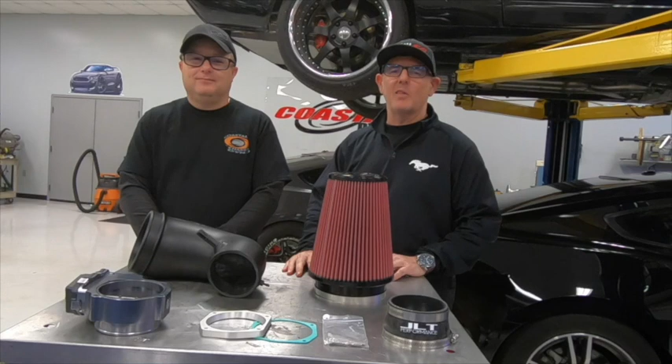Back at Coastal Dyno, hanging out with Sam. Got the GT500 on the dyno. It made, what, 930 or something like that? Yeah, like 935, 630 foot-pounds of torque. So we're going to go for more. So we got some new parts.

As you can see, we got a prototype JLT cold air intake with a big giant filter. And we've got a big giant throttle body from VMP. Yeah, 105 millimeter. The factory throttle body is 92. So we're going to try and stagger the installation. We're going to do the intake first just to see. I have a suspicion that we're losing a lot of airflow just through the factory intake.

So this unit will be available, I think, Jay said, in 30 or so days. So okay. Yeah, this is a prototype, 3D printed, but it's the right shape. It's what you're going to get if you got a GT500, right? Exactly. And they'll also be coming with most likely a new airbox also. Right now we're just using the factory airbox. Like I say, total prototype. It's just for testing purposes.

And real quick, what's done to the car to get to the point where we are with 930 something horsepower? Yeah, right now it's got American Racing long tubes on it. It's got a Joker's Performance ported blower, Griptec 245 pulley. It's on E85, ID 1300 injectors, and a JMS booster pump, and that's it.

And we're probably actually running way too small of a pulley on the car right now, but we're not putting a lot of timing to it. We're just being careful with what we're doing and taking it step by step. Hey, and they're brand new, so it's all experimentation anyway, right? Exactly. Yeah, for sure. All right, let's get back in the shop, and this should be a pretty easy install. We'll throw the parts on, and then we'll put the throttle to the floor.

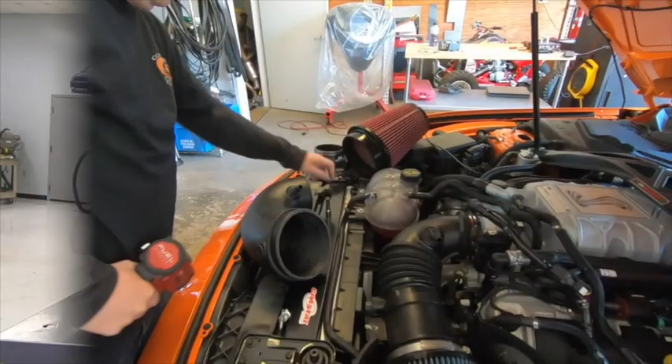10-4. All right, so here's a look at what we got going on. We already took the factory lid off. Sam previously installed a free-flowing filter. And just like any cold air intake, you're gonna disconnect some sensor wires and clamp to the throttle body. This unit will come out, no big deal. Here's a little comparison between the JLT and the factory. Sucker is huge.

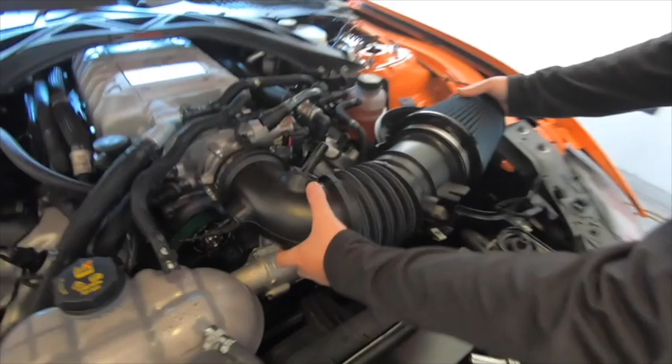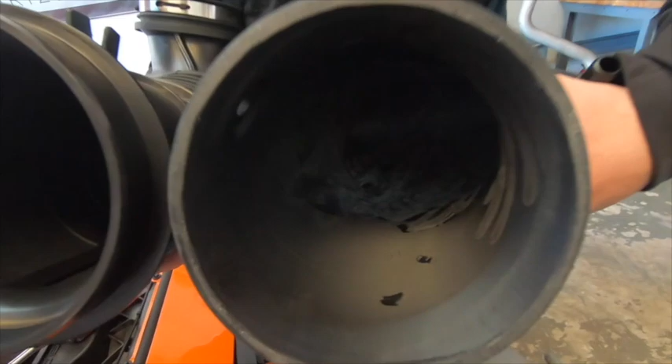We already pulled the filter off just so we can get a look inside and see exactly the difference between the two. Yeah, like I say, the inside of this is 3D printed, so it's not going to be like the production piece. Quite a bit larger on the JLT, and obviously it doesn't have the ribs. Yeah. So the turn should be a little bit smoother.

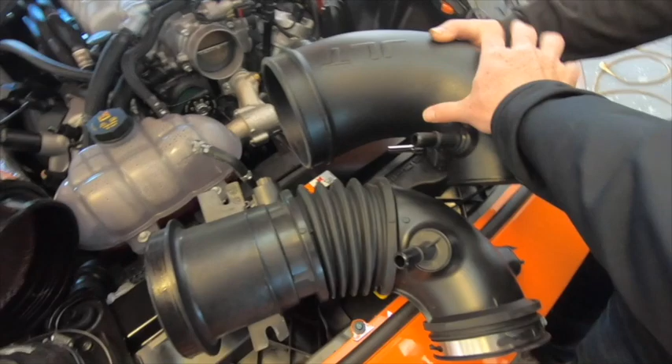Do a little compare. Let's hold them next to each other like this. Yeah, you can see in the radius, the JLT is much larger. It's obviously larger at the filter opening, but the radius is much bigger. So this kind of chokes down, still enough to make 760 plus.

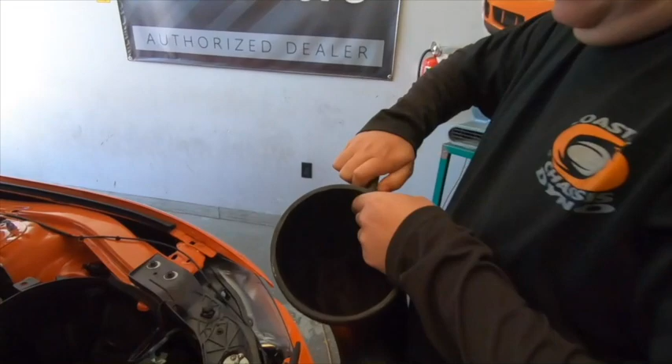Oh yeah, absolutely. The only thing that you physically are going to be reusing out of this is going to be this sensor right here. It should just turn and pull out, and you can throw this in the JLT. It uses just a grommet. You just kind of slide it back in there like so.

So the JLT unit actually comes with its own airbox. Don't have that as of yet. So what we're going to do just for testing purposes right now, we're going to go ahead and just remove the factory airbox so that we can get the JLT in there on the dyno.

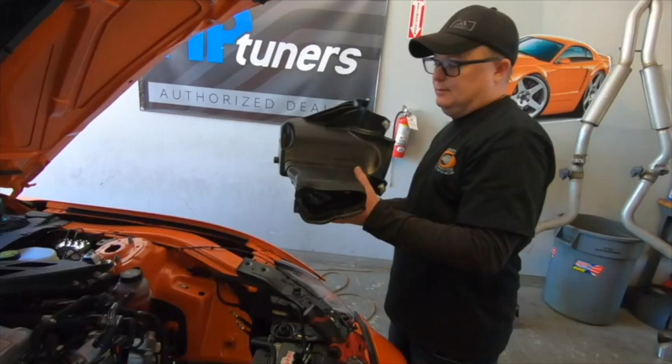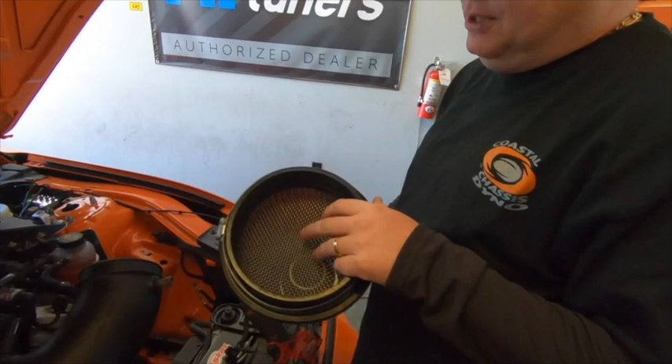Hey Sam, before you throw that on, I see the filter has this screen. What's going on with that? Yeah, that's usually for like a mass air car. This kind of smooths out the intake of the air. Obviously on this vehicle that isn't really necessary because we don't have a mass air. All right.

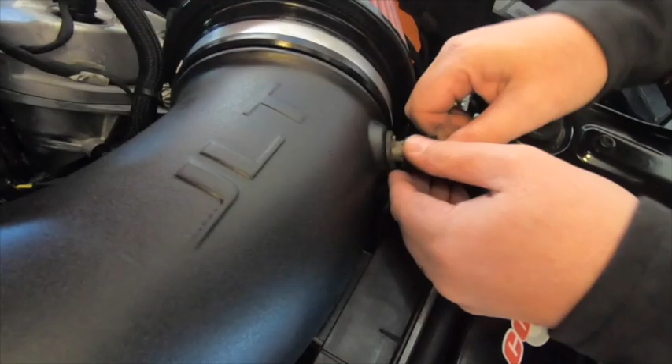All right, we're back in the car. Sam's doing a little computer work. Yeah, so we're gonna make another pull now. We haven't changed anything at all in the tune from our baseline. Still only running the car at 8,000 RPM. We're not running any higher than that, just to be fair with the differences between the two.

What a lot of people may notice when we do dyno pulls here is we're actually on a load-bearing dyno. So we're actually loading the car to the weight that the car would physically be pushing on the street. That's why you see that our dyno runs are a lot longer than you would see on, say, a Dynojet that was non-loaded, or some of the other dynos that don't have loading capability.

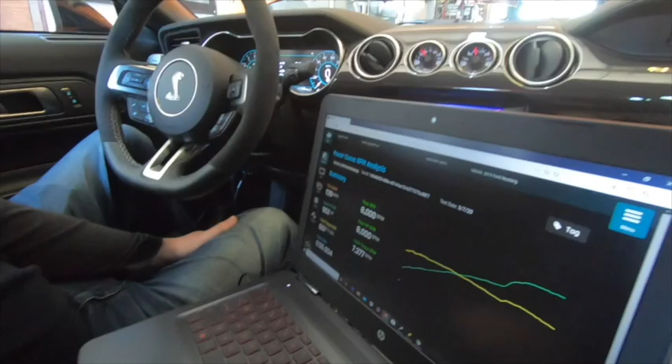On the boost, you could watch the tach really just take a jump. That's when it spun the tire, right? Yeah. So 962 horsepower. Yes. 667 foot-pounds of torque. So we picked up from the intake more or less 30 horsepower to the rear wheels. Just from putting the intake on, so pretty impressive. And you didn't even tune it, so... Nah, we haven't done anything.

Just to be perfectly honest and upfront with everybody, I've got a lot of power pulled out of the car down low. It's not going to affect what peak numbers we're seeing. You can argue that people are concerned more with peak numbers than through the curve numbers, but right. We had pulled a lot of power out of it for NMRA when we were trying to get the car to not spin and so on and so forth. But that was just literally a part off, part on test.

So anytime, especially with new cars, but really any hot rod, anytime you do a cold air or a new carburetor or a new throttle body, it's going to take a little bit of tuning. It's going to like a little bit of different timing, maybe a little bit of fuel trimming. Exactly. So there's definitely more than that 30 horsepower in that cold air. That was literally just as if you did it trackside. Exactly. And didn't tune the car. 100%.

So what's your next move now? We're just going to do the same thing. We want it to be apples to apples throughout the whole deal. So we'll pull the intake off, pull the stock throttle body off, put the throttle body back on with the JLT and see what we pick up from there. But really no reason to do the throttle body with the stock intake. I don't believe anybody would do that.

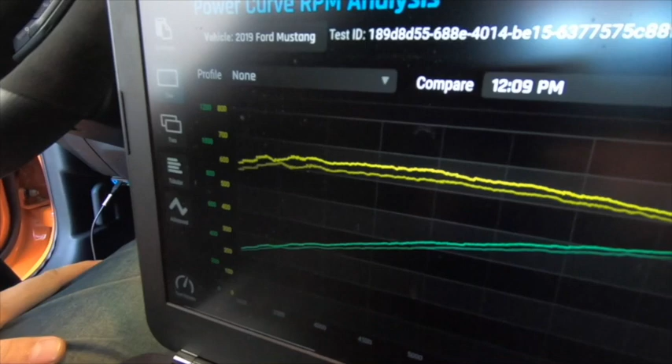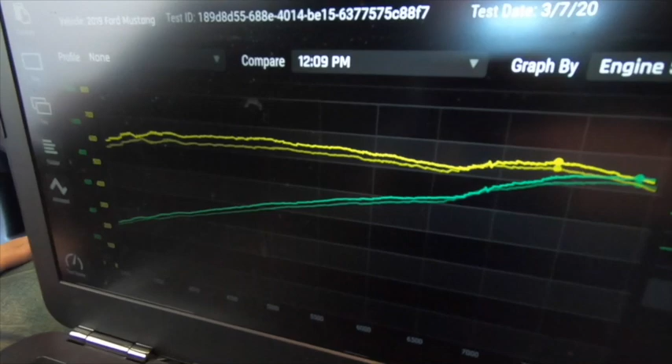All right, so here's a look at the curve before and after on horsepower and torque, and you can see the brighter color on the yellow and green is the after, the darker underneath is the before. So this is a mod that picked up power from the hit of the throttle all the way to redline. Yeah, without doing anything else whatsoever, you're picking up 30 plus wheel horsepower on a car that is already modified. On a stock car, I would probably expect to see very similar gains.

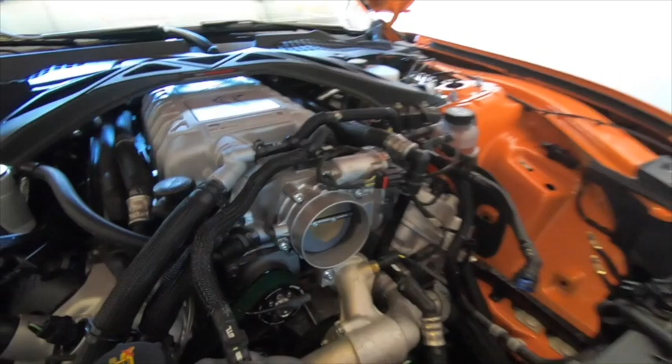All right, intake's out of the way. Next up, remove the throttle body. Pretty straightforward, right, Sam? Yeah, the only thing that's maybe a little bit different that some people may not have at home would be the T45 bit that's required to pull the bolts out of the throttle body.

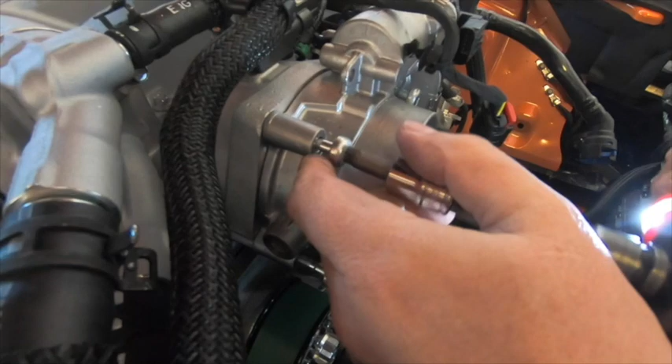All right, here's a quick comparo between the stock throttle body right here at 92 millimeters across and the VMP unit at 105. You can see the stock one takes a gasket and the VMP has this really nice O-ringed rubber gasket for sealing. It's just the 4 bolts. It comes with the electronics.

Give you a look at the front side. Nice and smooth entry. There's a look at the factory one. Quite a bit larger. Should flow a lot more air. And we're hoping for some more horsepower.

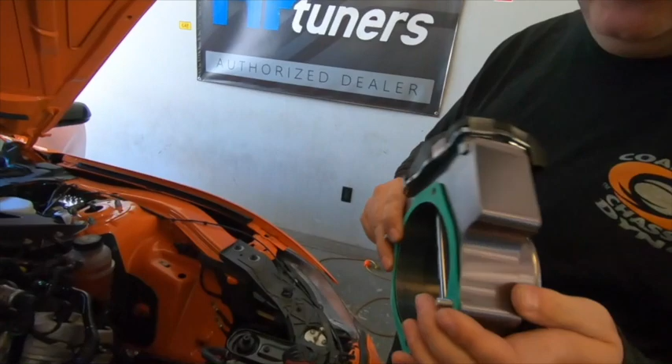Yeah, this unit actually is going to use a paper gasket because when we port the snout of the blower, if you look in here, we've actually cut out the O-ring that would normally seal the throttle body to the blower snout itself. Right, and then we already showed you that the throttle body, if you're using a stock setup, comes with that O-ringed gasket and the spacer, so you can just go ahead and bolt it right on with that.

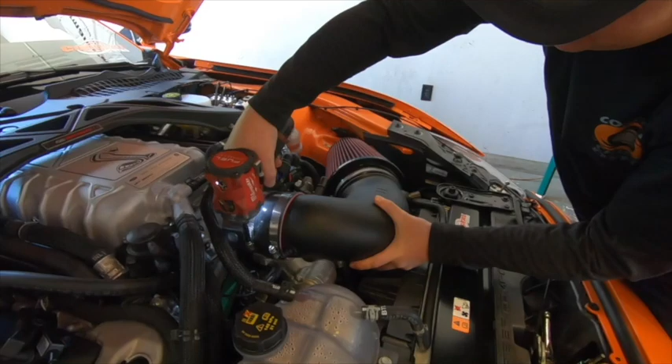Exactly. So did you take out that O-ring? No, we left the O-ring on there. It's not really going to affect anything. Should be it. All right, let's make some power.

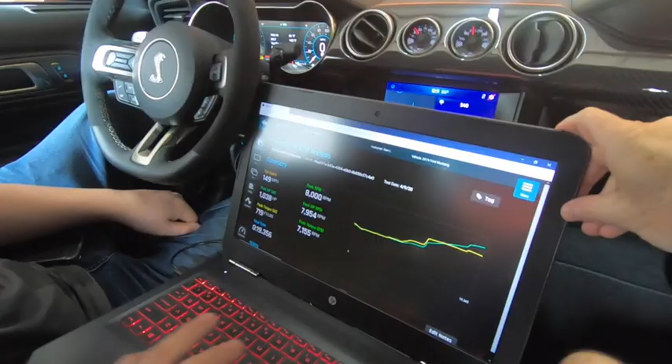All right, so we worked late on the throttle body last night and had a couple tuning things that we had to work on. Sam seems to have her dialed in, so we're back for a little more dyno action, right, Sam? One more, we'll see where we get. All right. Sounds pretty good on the shift. Yeah. Sounded good. Whoa, look at that. Yeah, we're still getting tire spin too, though.

All right, Sam, 1,038 horsepower. Yeah, we're getting there. So give us your take on what's going on here. Yeah, actually, it's exactly what I expected for the most part. The torque's a little low, but we've got a regular radial on it, so we're getting some tire spin down low, so that's an issue.

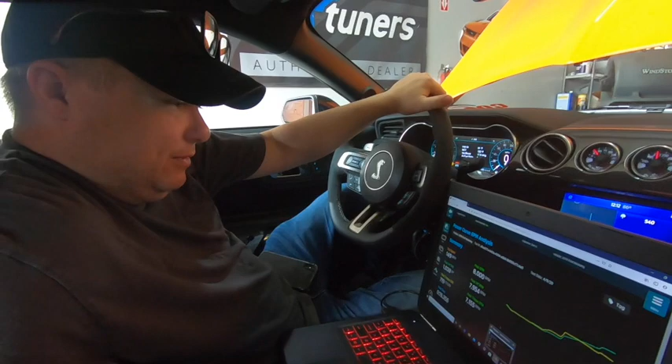But does that affect the overall horsepower? No, because the horsepower is going to peak up higher. It's going to affect the torque number though, so the torque number should definitely be a little bit higher than that. But we'll work on that. We're going to get another set of tires on here with better adhesion, and we'll go from there. Which graph is this here?

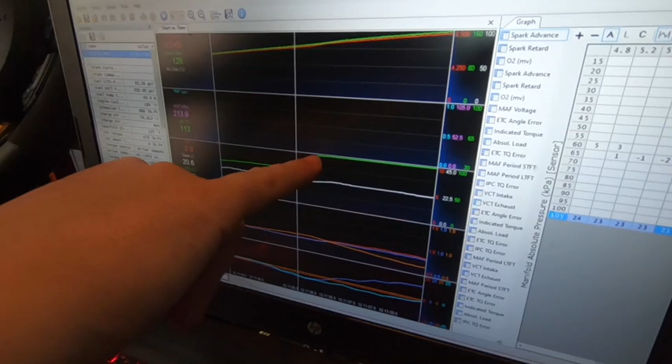Okay, so this right here is the green line. In this particular one is TPS. Once it goes up past the transmission limiter that we're seeing, you'll see the TPS goes. Right, so go back to this spot here, so you could see the transmission is limiting wide open throttle, and the engine's already at 6,500 RPM. So now it starts to ramp the throttle wide open, and then at 6,800, you have wide open throttle.

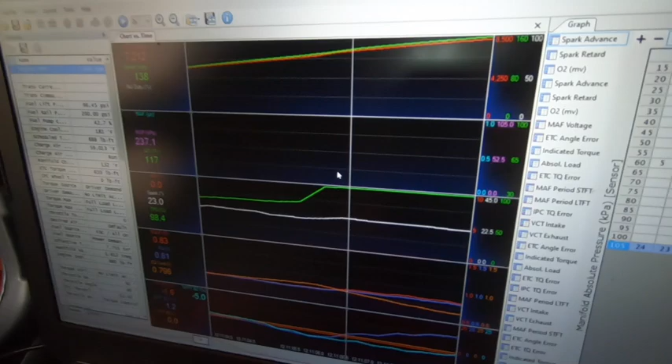Yeah, basically. And you can watch over here on the desired air source, and you go from the transmission to default, which is basically allowing it to go full throttle. Right, so then the rest of the sweep. Yeah, it's full throttle all the way up. So on that last pull, what did we see? We still have 1,000 rear wheel horsepower. Yeah, I think it was 1,038 or something right around there. Let's see. Yeah, the peak was 1,034.

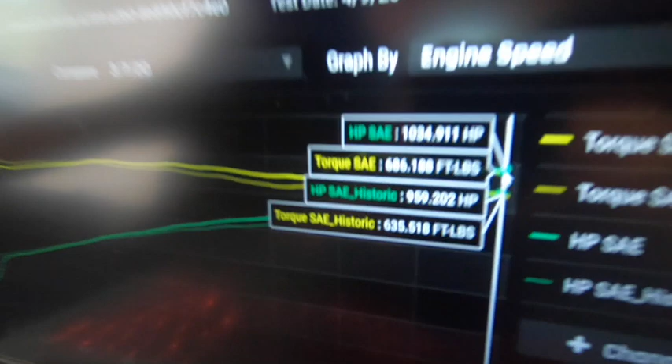All right, Sam, so what's next for the GT500 here at Coastal? Well, the next things are going to be getting it back to the track, getting some more data, working on the transmission tuning, obviously the biggest thing that we're waiting on now. So if we can get through that, we should be able to make well over 800 to 900 foot-pounds of torque, and along with that 1,000 wheel horsepower.

But we'll see how it goes. That's just something that we're working on, and it may be another 2 weeks, as everybody says, or it may be another 2 months. We're just going to have to wait and see. All right, so there you have it, over 1,000 at the wheels. Sam's talked about what we're going to do next. We got to get this thing to the track.